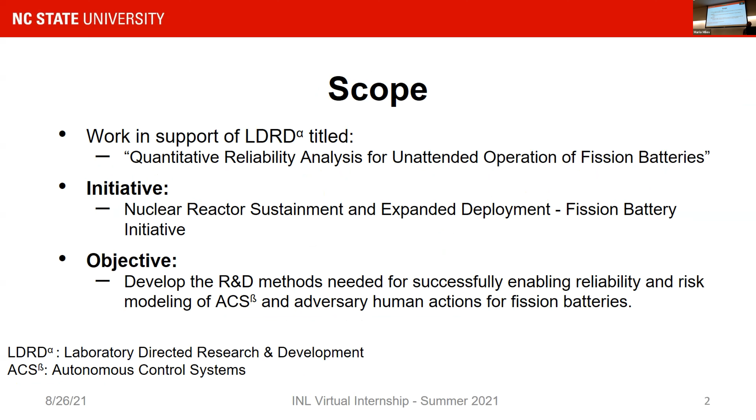So, a lot of terms here. We're looking at what a fission battery is. Essentially, INL defines a fission battery as a fission reactor with some other attributes, such as being economic, which is to say cost-effective throughout the entire life cycle; standardized, in the sense that it should be modular and able to link together with other things, and deployed easily; installed, which means you can deploy it and just forget about it; and of course unattended, which means once you deploy it, you can just walk away from it. So it could be in a container or something like that. And reliable, which means hopefully you don't have to come back to fix it.

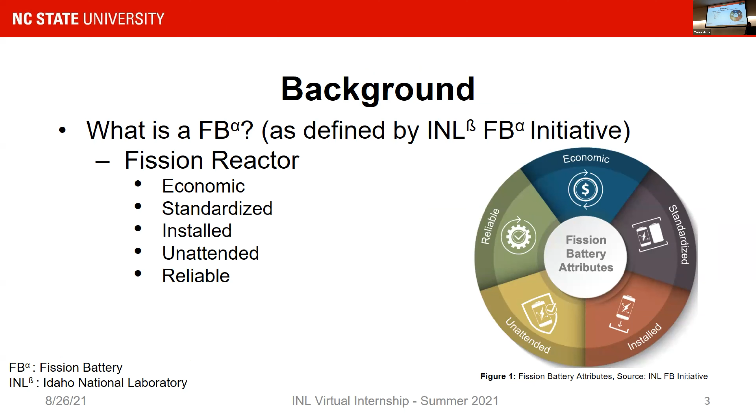And so what is the motivation for doing this? Well, if you want to build anything nuclear, you need to follow the licensing requirements, right? And the NEI 18-04 document, a non-light water reactor draft, provides the guidelines. Part of that is to perform a PRA, which is the probabilistic risk assessment, for a fission battery. And when we do that, we want to make sure that we make realistic assumptions about our system. And so part of that is to model the control system reliability as it is.

Since it's an autonomous system, it's going to run on its own. There's going to be no human operator in the loop at any given point in time, apart from maybe installation and end of life stuff. Historically, this type of work has been done for space applications by doing rigorous testing. If you're sending out a satellite or rover into space, you will do a lot of testing before you send it out. But oftentimes that's not possible and it's expensive. So we can do something else, which is simulation.

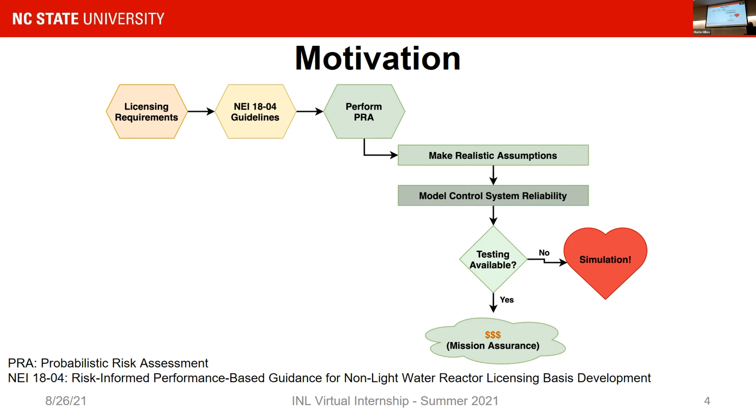And that's the core of this particular research. What we're simulating here is a fission reactor. This is from 2004. It's called SAFE-400, which is the Safe Affordable Fission Engine. This was built for NASA by Los Alamos. It's used for propulsion, but it contains in it a 400 kilowatt.

This is going to keep doing that, so sorry about that.

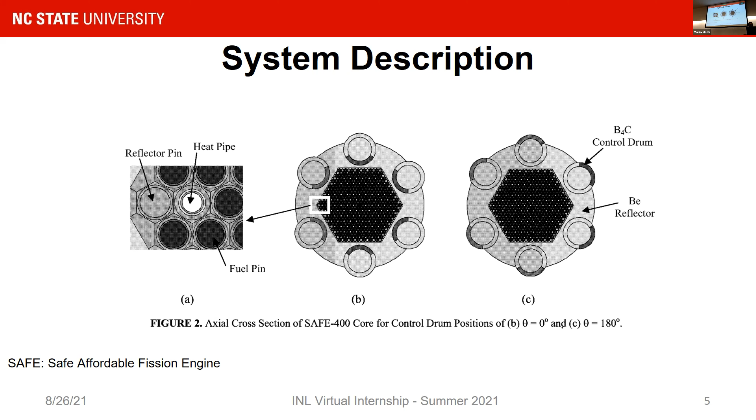So it's a reactor with control drums to moderate the fission rate. As opposed to a typical reactor that you may have seen that has control rods, this thing has control drums, which means instead of moving linearly, it moves axially. And as you can see on the diagram, there's some B4C.

All right, so that's our system. But we want to be able to control the system. And so if we want to control the system, we need to come up with a control model.

In this case, the plant is the control drum or set of control drums. It could have been 5 or 6 control drums. And we have a typical classical controller, which is a PID controller, which is a proportional integral derivative controller. In this case, it's cascaded together with a high-level input which says, look, I have a reactivity target. I want my reactor to be at a certain reactivity at any given point in time. And I want to do that by mediating the control drum position. So that's the first PID that you see.

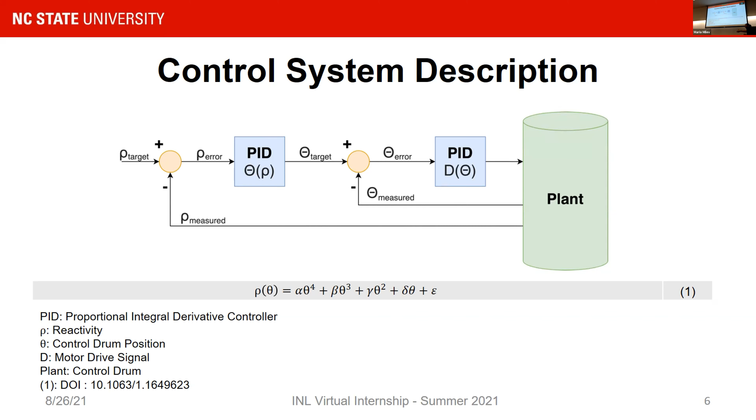The equation here comes out of the work of Dr. Shannon Bragg-Sitton from 2004. And so this model is built around that logic. So we can go from reactivity to control drum position to the actual motor drive signal that moves the control drum in position. And so that's the system.

Now we need to talk about what are we doing. Typically, a PID controller is not implemented as one thing on a computer, or on your autonomous control system. Typically, it's part of a PLC that's running hundreds of PID loops at any given point in time. And that's ultimately modeled as computer hardware.

And so if you want to be able to capture failures at the controller level, we want to be able to look at, well, what's the code, what's the hardware, and how do those interactions happen? And so this is a typical pipeline that we have kind of seen over here. So you start with the source code. So that would typically be the logic diagram or the source code for a PID controller or a set of cascaded PID controllers that you compile into hardware-specific assembly instructions that's dependent on your machine.

So that's, if you're running it on your home computer, it would be an x86 processor. If you're running it on a Raspberry Pi, it would be an ARM processor. If you're running it on a PLC, it would be specific to the PLC's logic. And you compile that, using this tool called LLVMPars, which is also part of the DEPM methodology, we create what is called the DEPM model.

As an input, you also need, so it converts everything, all the assembly to failure models. And for each instruction at that assembly level, you provide a failure rate. So an addition operation, for example, may have a lower, I could argue, failure rate than a multiplication operation. Why? Because addition requires maybe orders of magnitude lesser number of transistors to implement than a multiply operation, but it depends on what is implementing it.

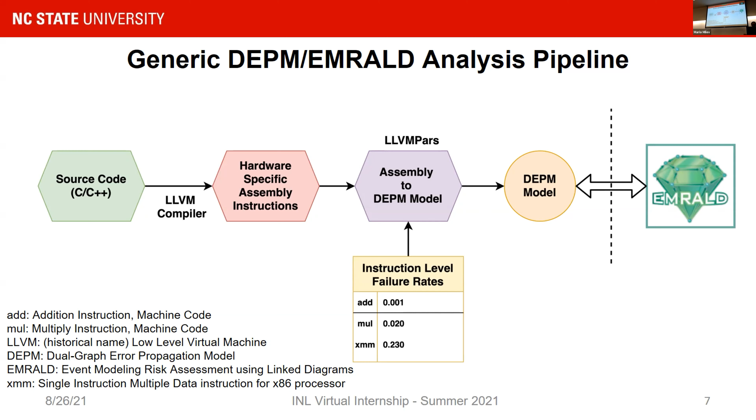So with all of that, what we get here is just one half of the DEPM model. It's all the relationships between all the instructions. So if you don't look at assembly, don't worry about this. It's a lot of move operations. Move the data here, move the data there, etc. Anyway, it's there. I just wanted to show you that.

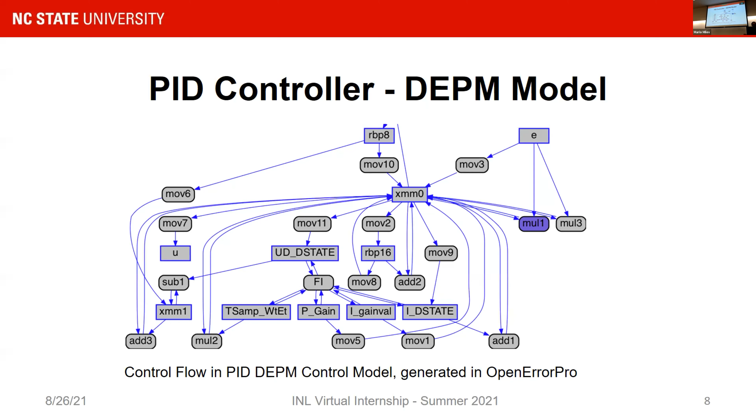And when all of this is done, oh, I should also mention, over here, we were only modeling the PID controller. There's also the entire control drum. We haven't modeled that. Modeling the control drum requires further analysis. You have to look at the physics of failure models. You have to look at the mechanisms by which it would fail. And so statically, we have performed some analysis here.

Using a simple fault tree. This is done on an in-house tool that our lab is building. It's called OpenPRA. You can access it at openpra.org. It's free to use, and if you want to develop software for us, that would be awesome.

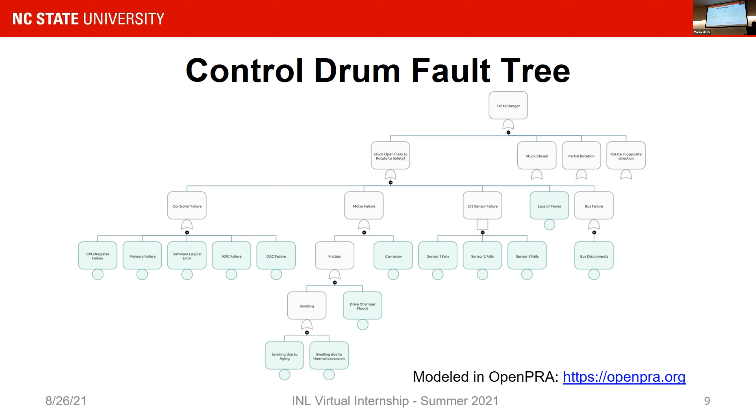And so that's for the control drum side. Now we put everything together. So I haven't mentioned anything about EMRALD. EMRALD is a tool that essentially performs dynamic event tree analysis. We link DEPM to EMRALD, and we map it from the failure space to a function space.

As you saw, the system itself was pretty complex, so you can't directly make that assumption. You have to run the model and get some results. One thing to mention is that this is all based on discrete time Markov chains, which means it suffers from state space explosion — too complex of code, and you end up waiting forever. So you don't want to do that. There's some part where you have to be careful about how you design it.

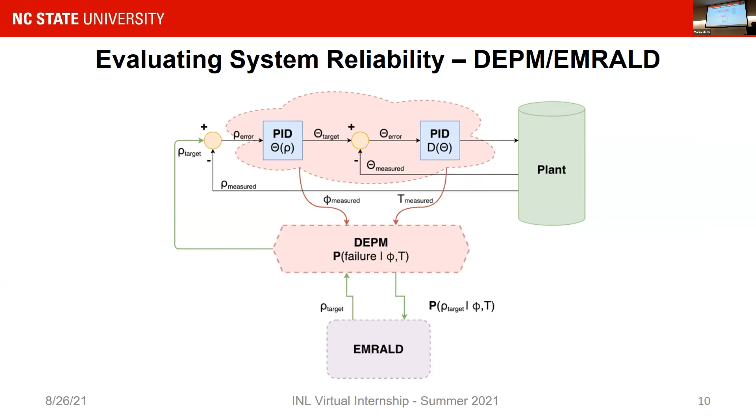So that's the model, and this is ongoing work. There's a lot going on right now. As I said, this is the first year, and there's at least a couple more years of this work. We're going to continue doing that. And I've skipped a lot of slides, but here we are.

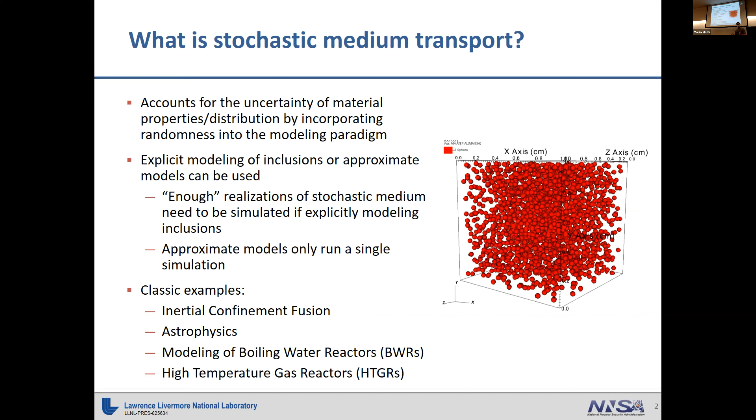To give examples of some of the ways in which we try to account for it, the classic way is you essentially average your properties together. You have some volume fraction of your materials, multiply fraction 1 times the material property of 1, then volume fraction 2 times material property of 2.

And you add them together, and that gives you your mixed or atomic mixed model. Another option was developed by Gordon Olson in 2007. He did this specifically for the set of examples he was investigating, where he took a 2D model of material randomly distributed in cylinders and looked at the transmission through a slab, so transmission through that stochastic media.

He took those results and performed a least squares fit to find an opacity, which in the neutronic sense is a cross section. We're talking about photon transport here, where it's called an opacity - in neutronics, the equivalent is a cross section, just so you understand the language difference. He used a least squares model fit to those 2D results to get an opacity, and then used that 2D least squares model to give a 3D opacity to use in his calculations.

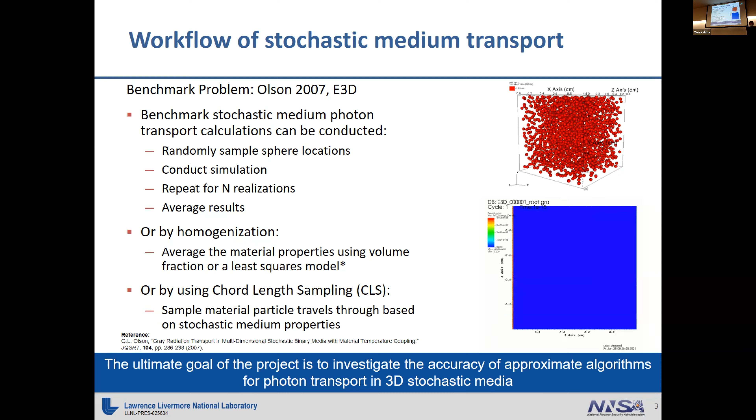To generate these benchmark results, we use something called Maestro. Maestro is a high-level program written in Python that allows you to put in some data, some parameters, and then generate parametric studies on the fly for your batch system of interest.

Does anyone here run on RDFMG? Okay, that uses the Slurm batch system, which has a certain set of commands. Say you go to another lab or university with a different batch system - what do you do? You have all these ad hoc scripts written to run your parametric study using Slurm, and now you have to re-implement that code for a different batch system.

What Maestro does is abstract away your batch system, allowing you to generate these parametric studies independent of the system you're running on, then submit the job to Maestro to generate results. It also lets you extend a basic parametric study by creating a pgen file, a parameter generator, which allows you to create custom lists of parameters to pass into Maestro that will generate the Slurm run scripts and run all the simulations you want to get the results.

And then you can call your script at the end to go through, scrape the data, produce some pretty plots, and Bob's your uncle at that point. You got stuff to put in the presentation or in a paper. And so I showed that right here. This is what I show.

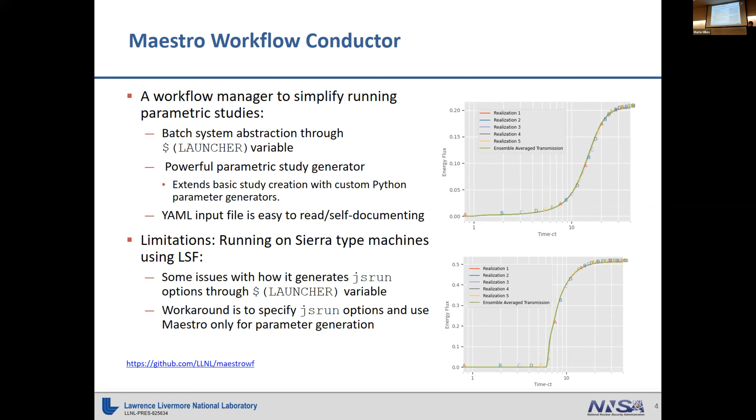So progress from this summer, I show some videos here of a simulation based upon an experiment that they're running at the National Ignition Facility, also known as NIF at the lab. And so you have photons that are streaming in here from a constant temperature source, and they're migrating through. And you can see the different spherical inclusions there, and you can kind of see here where some of those spheres lie in this 2D slice, because the photons essentially are getting blocked by the spheres and absorbed in them more generally.

And so that's one of the things that I was able to do using Maestro and then the stochastic media transport framework. So specifically what I ended up doing was for IMP, I generated a 3D deck to run the E3D problem that was published by Gordon Olson to compare to. I did the same thing for the shock tube 3D, which is this experiment right here. And then I also investigated running the E3D problem on GPUs and assessing the performance there.

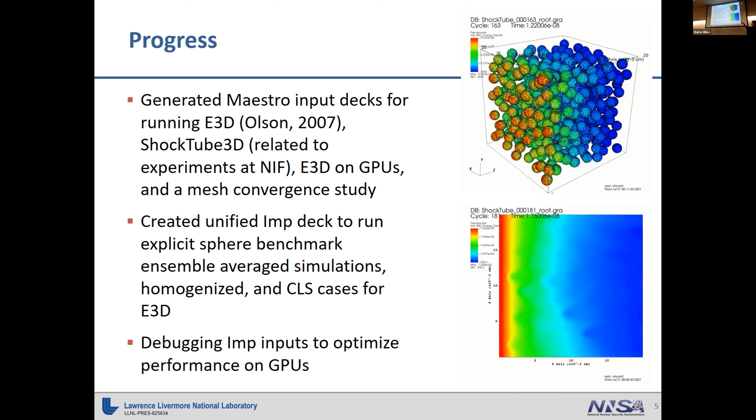We had some issues because essentially you run out of memory on the GPU when you ran too many particles, but in order to get a speed up, you had to run a lot of particles. And so we kind of put that to the side and focused more so on the shock tube and the E3D problem. And I'll show you why in a minute, because we have results here for 2 different opacity and equations of state models.

And so we have a constant opacity, so your opacity is set at a constant value, but a Marshak equation of state, which essentially is an aT cubed relation for your specific heat. Over here, you have a temperature-dependent opacity, which is some constant divided by T squared, and then a constant specific heat result. And what you're seeing here is that these different CLS algorithms, Livermore Pomraning and local realization preserving, perform very well to match our benchmark results for this temperature-dependent opacity case and for this constant opacity and Marshak equation of state case. However, it does not match the results that were published in Gordon Olson's 2007 paper.

And the main reason is because his paper uses a diffusion model, which doesn't really capture the effects of basically the anisotropy in the problem and the fact that this problem is a pure absorber. So it's not actually diffusive in nature. And so these results obviously are going to be different. And we've confirmed the differences using an independent code called COLT.

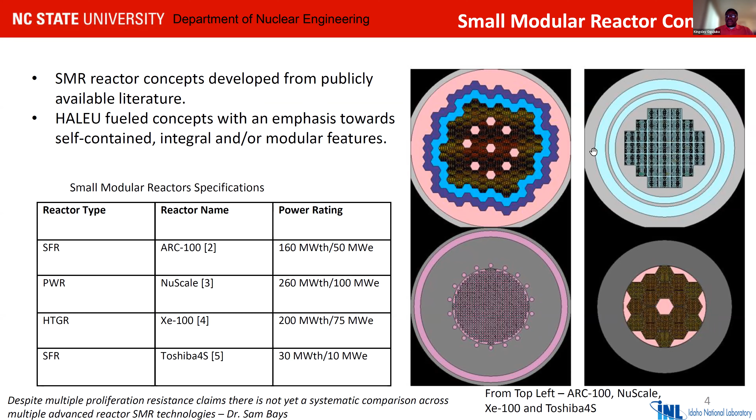Now, to quantify our significant quantity, we have the conversion ratio, which is basically the fissile inventory production ratio to the fissile inventory consumption. The models that we developed for this work were done with Serpent, and Serpent calculates its estimated CR based on the sum of all the reactions that produce the fissile isotopes, and then divides it by other reactions that remove fissile isotopes.

From this computation, we can see that the ARC 100 has the highest conversion ratio of all the reactor concepts. This is expected because, like I explained before, the ARC 100 was designed to be a breeder reactor. Also, I failed to mention that Serpent also accounts for in-situ burning while calculating its conversion ratio.

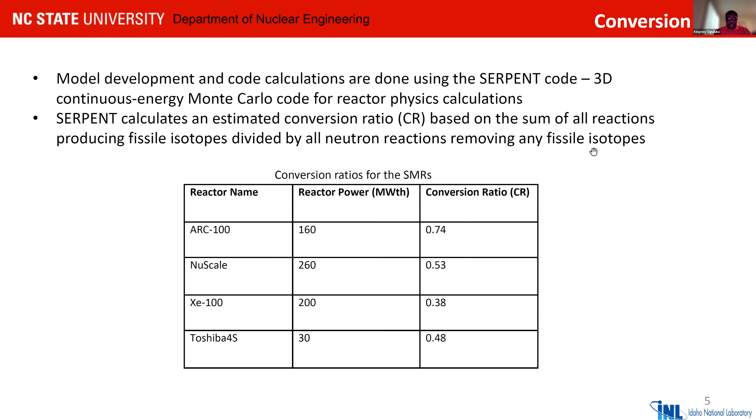Something to note here is that the Xe-100 has a very low plutonium production, as evidenced by its conversion ratio. However, for the Toshiba 4S, which has a comparably high conversion ratio, its SQ production for plutonium is very low in comparison with its initial fresh fuel loading. This is probably due to the small size of the reactor, which leads to a lot of leakage, and the initial HALEU loading of the Toshiba 4S is used to sustain criticality over the 30-year lifetime of this nuclear reactor.

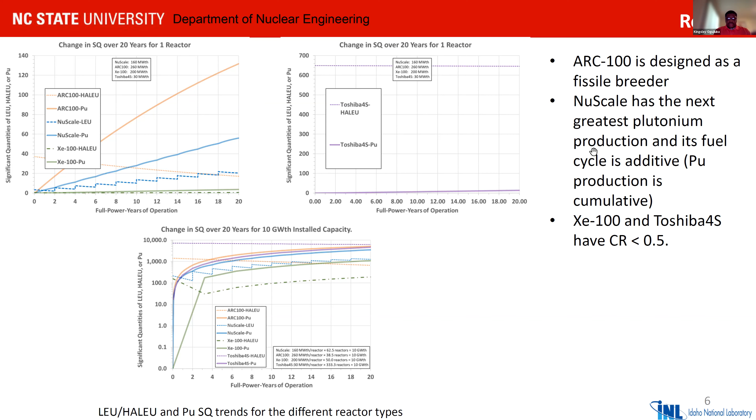Now, normalizing the results in the bottom figure here by taking into account a developing nation that has an annual requirement for energy, we can see that the orders of magnitude for the ARC 100 and the Toshiba 4S reactors are higher than the NuScale and the Xe reactors. Like I explained earlier, this is also due to the increased core lifetime and increased initial fuel loading. However, as we round out to about 20 years, we also noticed that the plutonium production for ARC, NuScale, and Toshiba were closer in magnitude to each other, with the value for the Xe-100 being another order of magnitude lower.

This leads to certain conclusions. We understand that our plutonium production is a function of our power level, our initial HALEU inventory, and the conversion ratio. The long life reactor designs, the 20 and the 30-year reactor designs, require higher than normal HALEU inventories, and thus they also create higher than normal plutonium inventories at the end.

Now, the HTGR, with its smaller conversion ratio and SQ production, if a state wants to misuse its inventory, it stands to reason that they would rather lean towards enrichment services as opposed to using the plutonium inventories. However, for SFRs which have higher CR and SQ production, state misuse is leaning towards plutonium diversion. This is important because it helps to state where the IAEA safeguards are going to be put in place in order to monitor and detect these kinds of misuse for these different reactor designs.

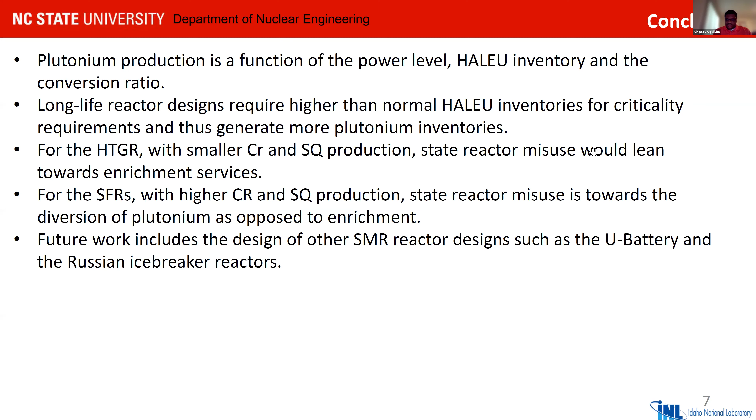And furthermore, the work is also being improved to include other SMR reactor designs like the U-Battery, as well as the Russian icebreaker reactor, which converts HALEU to LEU reactors. Thank you very much.

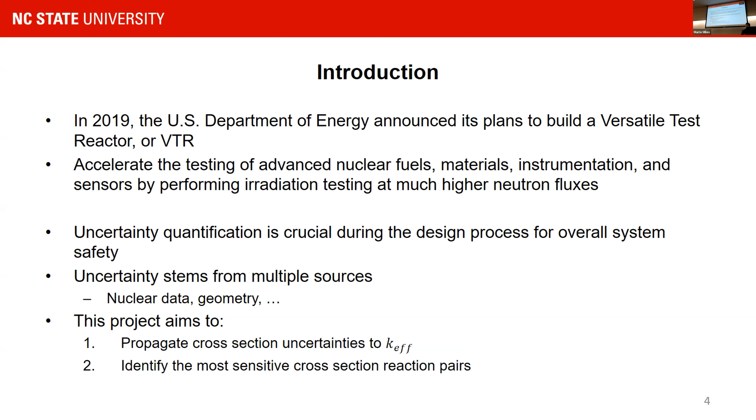Various different input uncertainties include nuclear data, geometry, mechanical properties. The specific uncertainty that we looked into was nuclear data. Specifically, how does the uncertainty related to nuclear data affect our uncertainty in the K effective of our VTR core? And after we do this, we'll be able to look into what are the most dominant cross-section reaction pairs. An example of that is, let's say, U-235 fission.

Sodium-23 has a higher mass number than hydrogen when we're considering light water. Because it has a higher mass number, it doesn't moderate the neutrons as much. So we're able to have the neutrons on average at a higher energy range. So when the fission events do happen, we get more neutrons on average per fission event, which is why we have a better neutron economy.

Another benefit of using sodium as our coolant is that it has a large boiling margin, around 800 Kelvin. This allows us to operate the SFR at higher temperatures, which would increase thermodynamic efficiency. And because of this high boiling margin, we can also operate the system at a lower pressure, in essence, increasing safety margins.

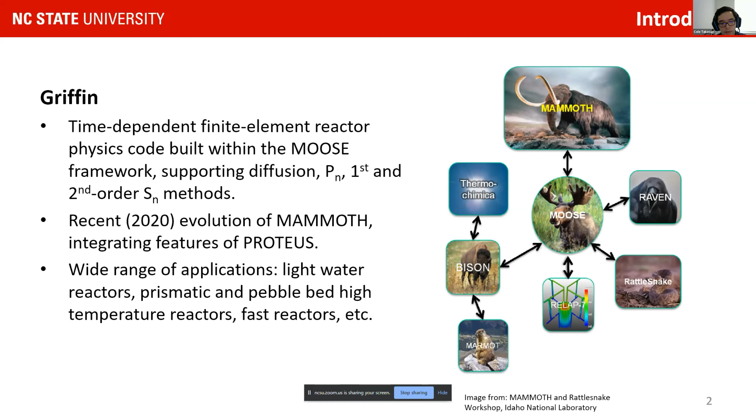So to give some context to the internship, the Monte Carlo code Serpent is used at INL for generation of multi-group cross-sections that are used in Griffin. And it can also be used to generate reference flux and current for use in equivalence procedures such as superhomogenization or calculating discontinuity factors.

However, applications of a Serpent-Griffin scheme to different reactor designs observed significant differences in the kinetics parameters between Serpent and Griffin. So they would find delayed neutron fraction and mean generation time would be significantly different between the two and produce some difference in expected transient behavior.

So the goal of the internship was to assess how well Griffin preserves the kinetics parameters from Serpent for various different modeling options, potentially identifying where these differences are coming from to inform future work and to validate these kinetic parameters with experimental results.

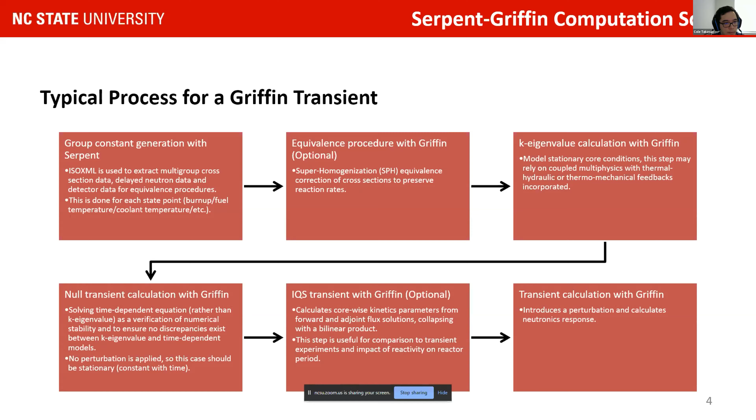So the reason why I'm talking about this specifically is because they observed that the selection of regions for SPH equivalence had an effect on how well the kinetics parameters are preserved. So whether it's only in the fuel or also in some reflector regions, for example.

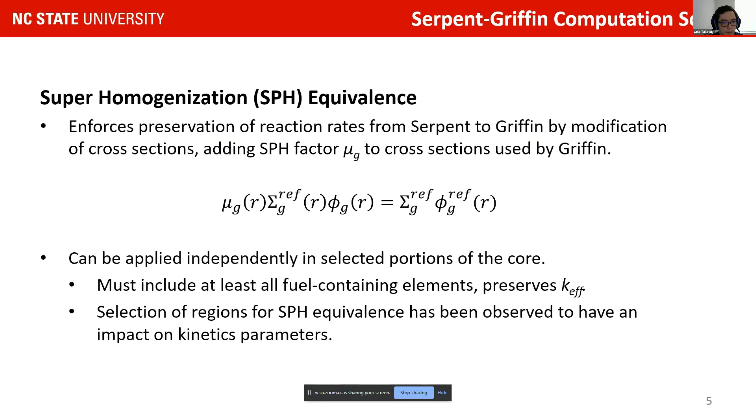Then we convert cross-sections to the format for Griffin, and then generate the SPH factors for Griffin, set up steady state forward and adjoint solutions to feed into the Griffin IQS transient, which then collapses kinetic parameters. With the Griffin kinetics parameters, we can compare against the Serpent ones to verify how well they are preserved, and then compare against the benchmark to validate the overall scheme.

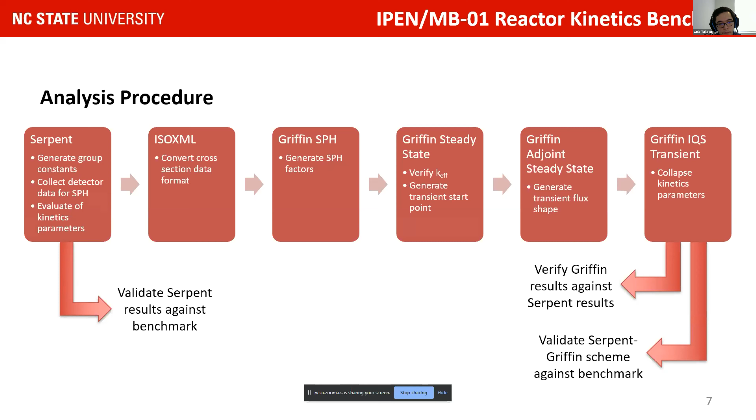So this is based on the Serpent model. I don't need to go into too much detail on it. The important things are that we repeated it for two different libraries, ENDF/B-VII.1 and VIII.0, and generated cross-sections from it for 4 different energy grids: a 2-group, 4-group, an 8-group predefined one, and a 4-group energy grid that was refining the thermal energy. So the reason why we did this is because there was also an observation that somehow the number of energy groups was also affecting the kinetics parameter results.

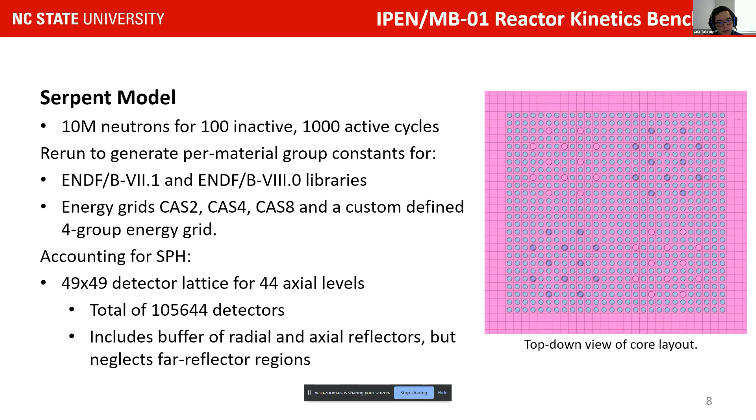And then to permit SPH equivalence, a 49 by 49 by 44 lattice of detectors was implemented in the Serpent model to collect reference fluxes. And this includes a nearby portion of the reflector region, but due to the low neutron count far away from the core, does not include the full reflector region.

Then for Griffin, in addition to creating different models or runs for each energy grid, there's also consideration of SPH equivalence: including the full set of lattice detectors, which included part of the reflector, applying only to the fuel, and also trying without SPH. Whether or not it's applied in the adjoint step was also a consideration. This totaled 40 different sets of Griffin runs.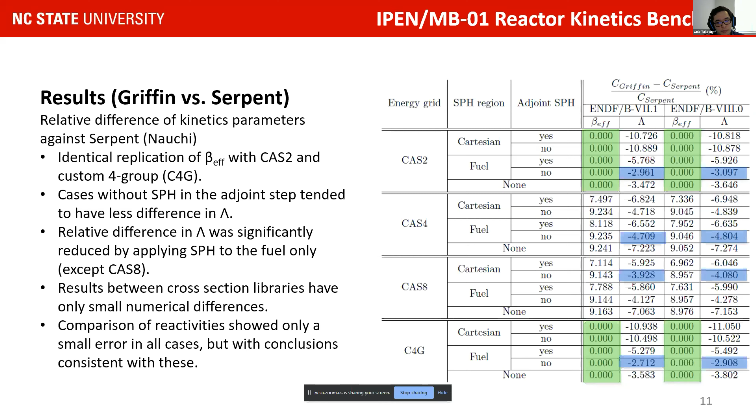And I'm not going to show them, but comparing the reactivities, Griffin in general preserved the reactivities very well because it's mostly based upon the delayed neutron data that is taken from Serpent directly.

So why are some of them perfectly replicating Serpent? If we look at how Griffin is collapsing the delayed neutron fraction, it's shown in this equation here. When the spectra of prompt and delayed neutrons are identical, these integrals disappear, and the effective delayed neutron fraction from Griffin is equal to Serpent's.

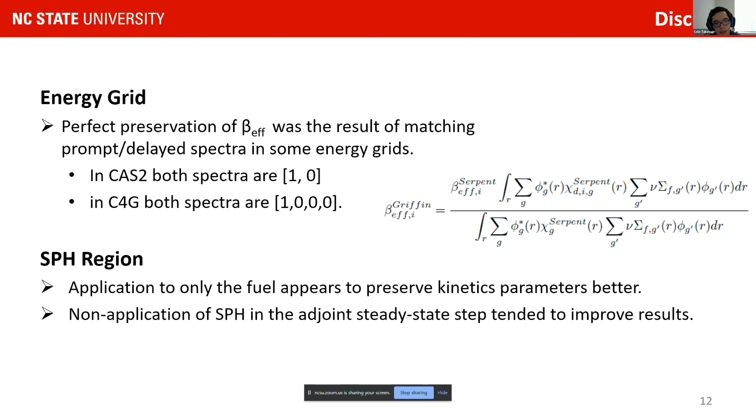However, when we have different energy grids, such as the 4-group and 8-group predefined energy grids, this introduces a factor that caused the difference that we observed. So this is the main source of the differences, but also the SPH application was found to improve kinetics parameter estimates when only applied in the fuel and when not applied to the adjoint step of Griffin calculations.

So to conclude, this is the Serpent-Griffin framework applied to the IPEN/MB-01 reactor kinetics benchmark as a validation of the Serpent-Griffin scheme and verification of Griffin's preservation of Serpent kinetics parameters. The major conclusion of this work is that the selection of the energy grid is extremely important in reproducing the kinetics parameters between Griffin and Serpent steps, and methods for optimizing the selection may be a subject for future work.

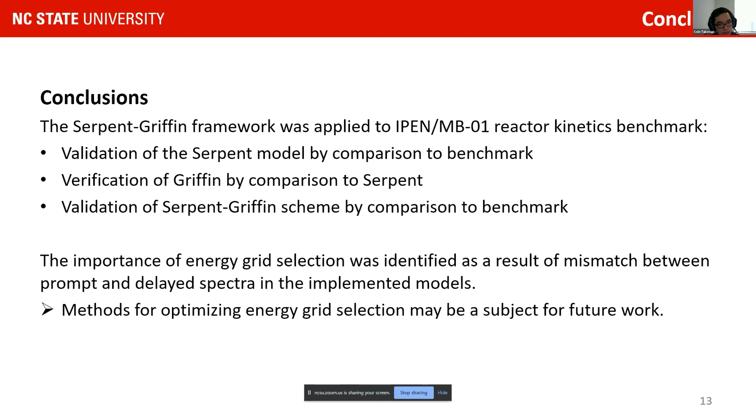I guess, if I'm going to try to combine this talk with the last talk, is there anything, for uncertainty propagation, that you have to worry about here similar to the previous talk, or am I missing something?

So if we're comparing to the benchmark, I think there would be, but since the primary focus is to look at how Griffin is preserving the Serpent results, since we're looking primarily at how well Griffin preserves Serpent's results, it's kind of isolated from the full problem. I mean, we are trying to validate the overall scheme, but the main driver of the work is what is causing the difference. And we identified that as differences in spectra, delayed and prompt.